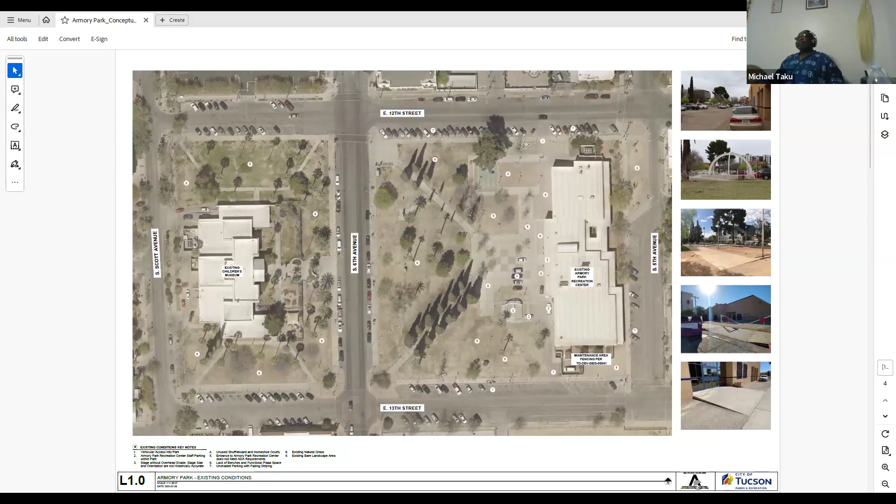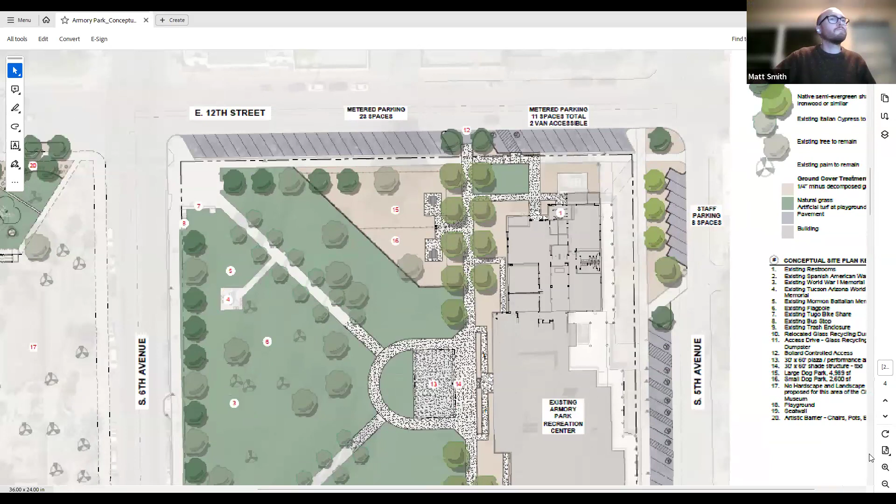So jumping into the conceptual plan, we have a few goals with this. One was to restore the stage, make it more useful, bring it to an area that's more in the historical context, enlarge the stage, to engage multiple users, multiple uses. The other was to bring back the trees of the park, both in an allée and the perimeter trees. With the parking improvements over the years, we couldn't work through the double line of trees along the perimeter, but we put in a double line of trees down the center of the park and shifted around the walkways, making the best of what we have with the 1970s improvements and trying to bridge that with now and with the historical context.

So the center part of our concept is this relocated stage. The stage currently is shown about 30 by 60, so greatly larger than what is currently there. I guess I shouldn't be saying stage, it's more of a multi-use plaza area. The stage is not elevated, it's going to be flush grade. Any of the existing concrete plaza space that's there right now will be removed. The existing trees that are in those square planters will be removed. And we're just bringing back a larger, more functional use area.

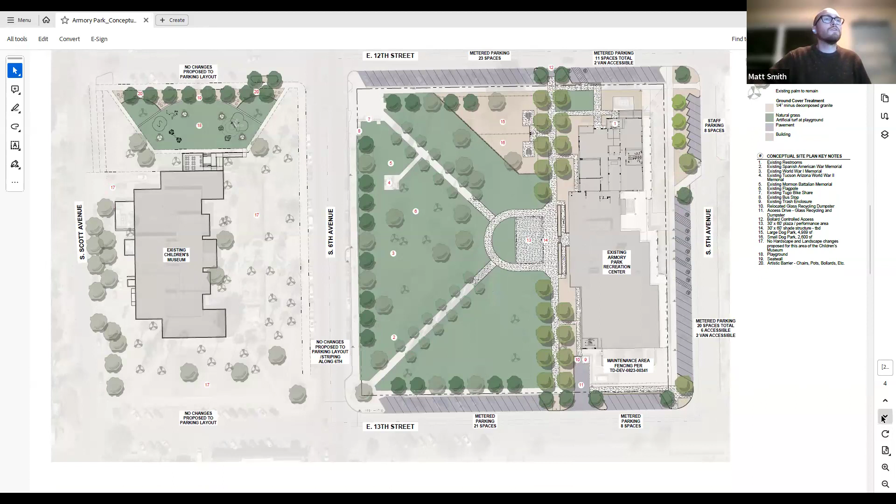We go now to some precedent images. These are options we were exploring for different shade structures, prefabricated and semi-custom. We could also explore fully custom, maybe incorporating a band shell. Swaim Associates is part of our team, and we are discussing with them options for this.

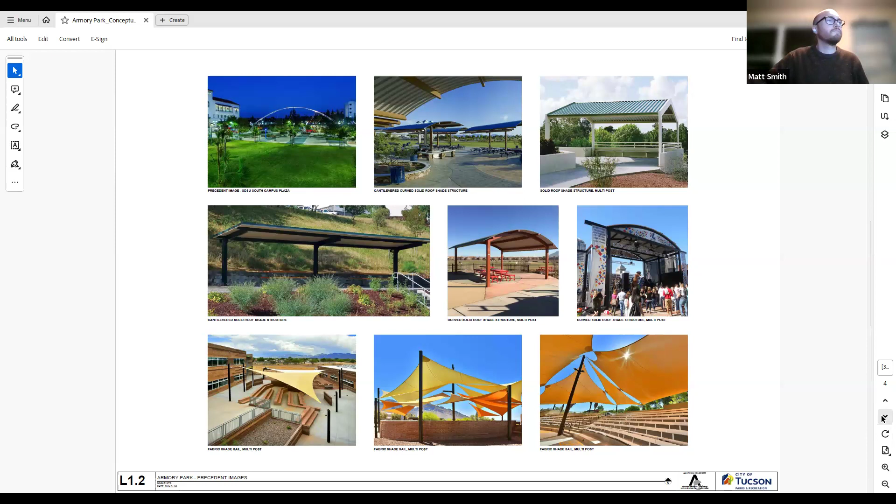The last bit of information covers some of the trees and materials we're proposing for this concept. Historically, Arizona ash flanked the sidewalk in a double course of trees along the perimeter. Some of those still remain sporadically. We are proposing, at least on the inner side of the sidewalk, to put this band of trees back, proposing that they be Arizona ash. As far as the central north-south array of trees, Chinese pistache or Joe Laney oaks would be two species we are considering, providing great shade canopy that fits within the character of the park and other parks in town.

One of the last trees we are looking at, more of a native tree, would be an ironwood, specifically for the staff parking along 5th, where there are some existing saguaros that this would tie together with.

Surfacing: most of the park surface that's not grass would be quarter-inch minus decomposed granite. Where possible, we could compact this for areas like the dog park, or if we wanted to incorporate games or other amenity areas within some of the larger open spaces. It provides a lot of flexibility while keeping with the character that's already there.

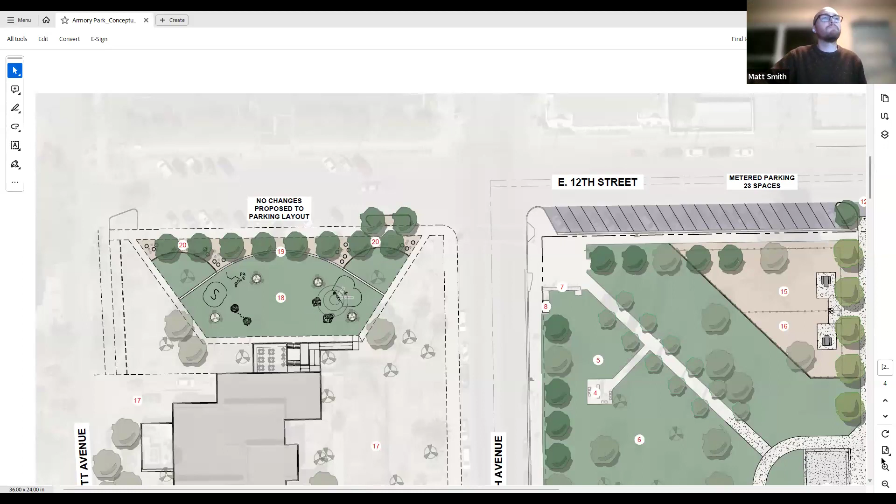Thanks, Matt. Jasmine, anything you want to add to that?

I know the reason we are breaking these up into two different projects is because they are two different types of projects, but we've been asked to look at several different issues impacting Armory Park itself, and we are conscious of the historical nature while also trying to meet the current needs of the community. We want to open it up to questions, comments, and feedback, but we'd like to focus on the two different projects separately, not go back and forth. So if we could focus primarily on Armory Park first and then come back to the Children's Museum area as a separate item, if possible.

I don't have anything to add. Thanks, Matt and Eric. Thank you.

Okay, I've got a couple questions for you. When I saw this, I was surprised that it hadn't gone to the landscape subcommittee of the Historic Commission prior to us, but I understand it's now scheduled for this Thursday. Is that correct? Correct. Okay. Steve Grady was unable to make it and is not here, but Jan Mulder is also on the landscape subcommittee, so after the board I may ask her if she has any comments.

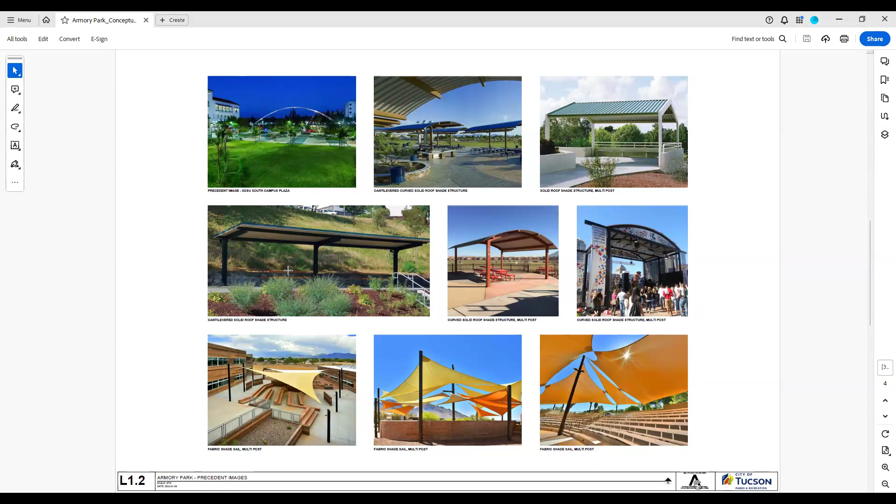Fencing, as far as the dog park is concerned, looking at it, you could look at that from two perspectives. The one you're looking at is taking characteristic features from Armory Park and using that as your basis. But you could also take a look at how to create the greatest transparency, because dividing up these park spaces is not typical of this kind of historic property. We worked with this at Anza Park, and it might be possible to come up with a fencing design that was as transparent as possible, which I think might be another alternative there.

Are you using DG for the dog park? We are, yeah, but it could be a similar treatment to Anza where it's turf until the turf dies out, if it dies out, and then DG is the alternative. Yeah, I just wonder what the dogs are going to like most, given dogs in Tucson.

Has anybody had any success in maintaining turf in dog parks? I think the best example is Anza. That's been going strong for 3 years now, I think. And we would have to reach out to city maintenance on that park and get their feedback.

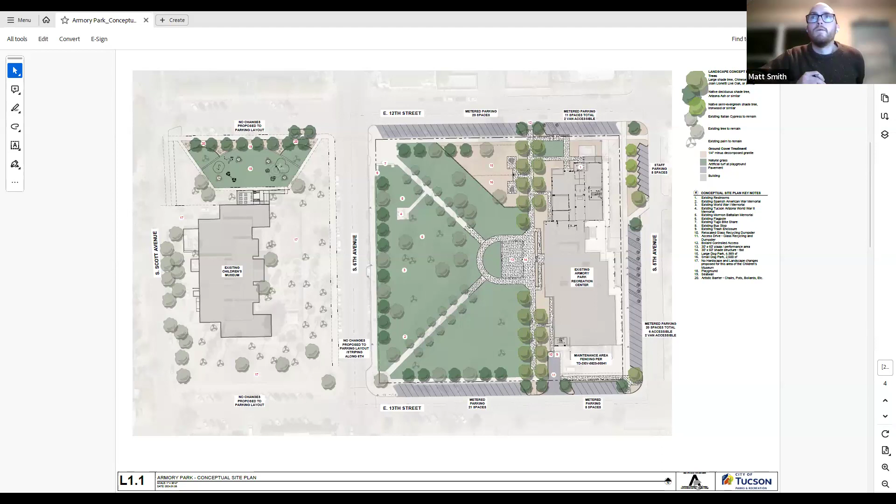Correct, we are still in the initial stages. Long way to go, but this is a great start with great feedback. Well, for $1.5 million, we should be getting a nice bandstand with a nice band shell. Let's put it that way.

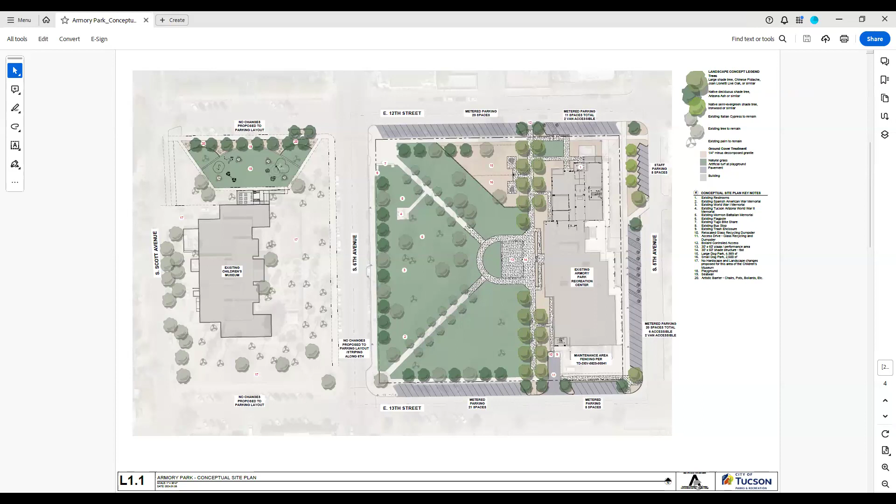Okay, Maurice, we've heard that. Some of us agree, but I think we're flogging a dead horse here now. So I think we ought to go ahead and move on, thank our guests, and move on to item E.

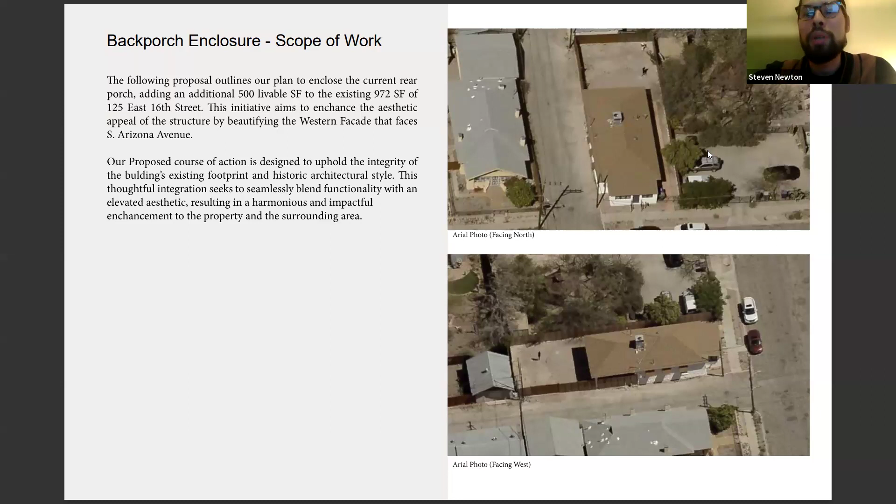The existing house is going to remain untouched, and the existing lighting plan is also going to remain untouched. So this is what the project is currently looking like.

We propose to use CMU because we saw in an earlier permitting set that was the structural system selected for the wall makeup. The roof is currently held up by existing headers and posts in the corner of the porch, so these are non-load bearing CMU walls. There will be stud walls built in front of them, which will be packed full of insulation as well.

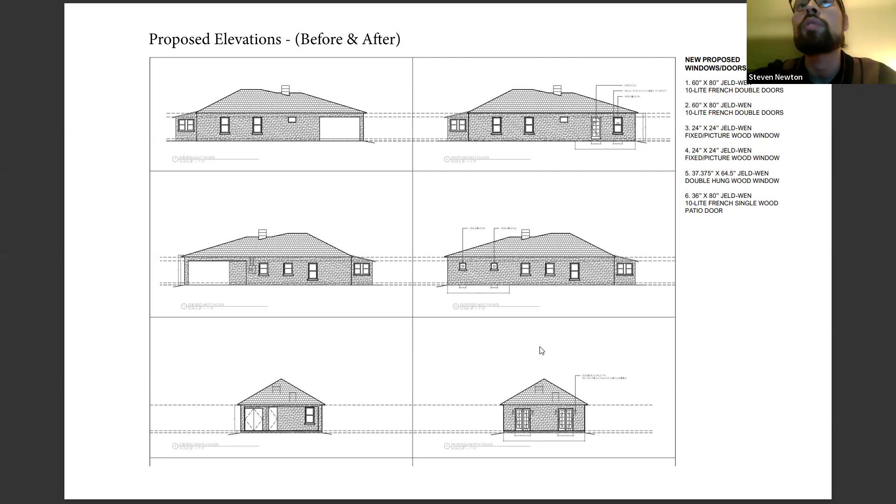Okay, well, it's replaced from what was approved on the plans that we have access to, because the 2010 plans, which are available on the pro site, do show that it was a restored original wood window that was vertical in nature, about 18 inches wide by a little over 2 feet tall, and they were allowed to put on new concrete sills.

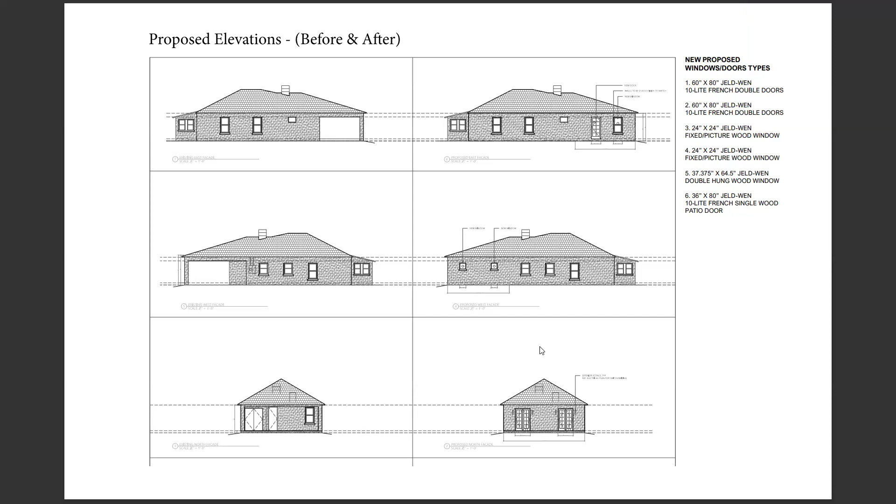I'm not sure who did the stucco job, but it looks like gunite on top of stucco at this point. And it did have originally a rock wall there, but you're also showing a recreation of a rock wall with stucco on the lower section of the CMU wall. Is that correct, or is that just going to be smooth stucco all the way down to the street?

We were thinking of just matching exactly what's on the existing house, just for consistency. So like the stick-on fake bricks and then stuccoing it to match the house is what you're thinking there? Something like that, or if we could get away with using the natural material, that might be the better looking of the two.

Okay, conceptually I don't necessarily have a problem with what you're showing. Now that I see you're dividing the new back room into 2 rooms, the French doors make sense for the western new room, but 3 new doors on a single room is a little out of the ordinary.

It would be helpful to have pictures of French doors, but I know there are some in the development zone, so I'm not going to question that. And wood, we always prefer.

Conceptually for the enclosure, I don't necessarily have a problem, but I'd like to see an updated plan that includes all the stuff that's been done and ask for permission, because you'll probably be approved for it.

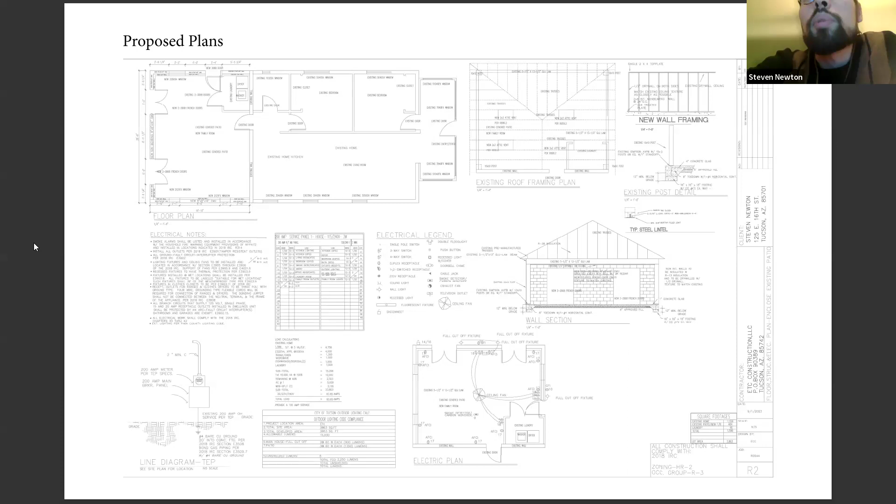Yeah, I believe that is an existing condition. My contractor might have pulled that from an earlier set of drawings. I agree, it's a bit redundant because none of these walls proposed are actually in fact load bearing. Well, that detail shouldn't be on the drawings. If I was a city, I would have a real question with that.

I think it's a problem because it can't be built as shown. So, you know, you can do what you want. Has the city approved these plans?

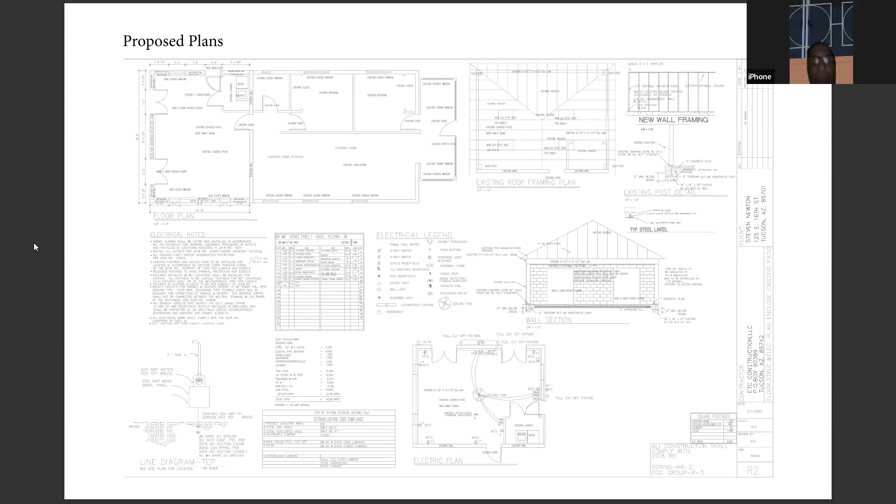The city has reviewed it. They're basically waiting for historic review to go ahead and do their rounds, and then I believe zoning will get a chance to review it afterwards. We're part of a zoning review. After you get a director's decision, once it is approved through us and then PRS and the planning director, then you'll have to go to building permits, and then they'll tell you everything else that you're actually going to need based upon the record of what they have. So they're separate issues. Michael can help you walk through some of that sort of thing.

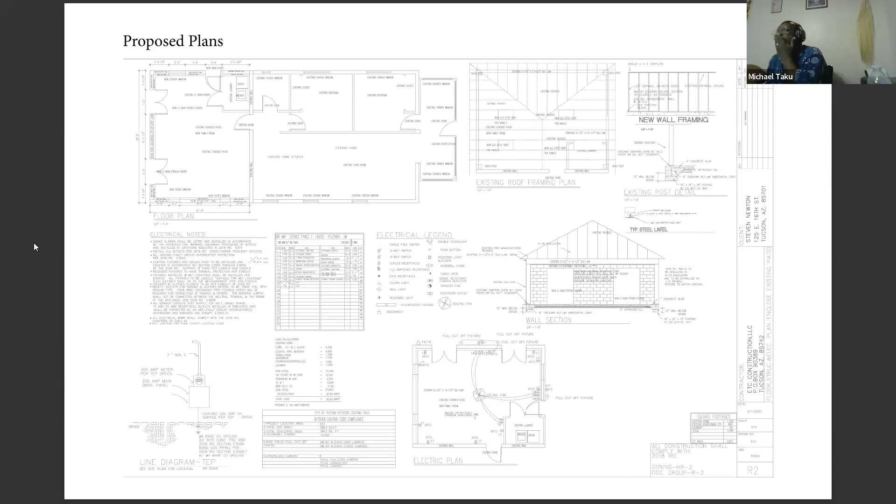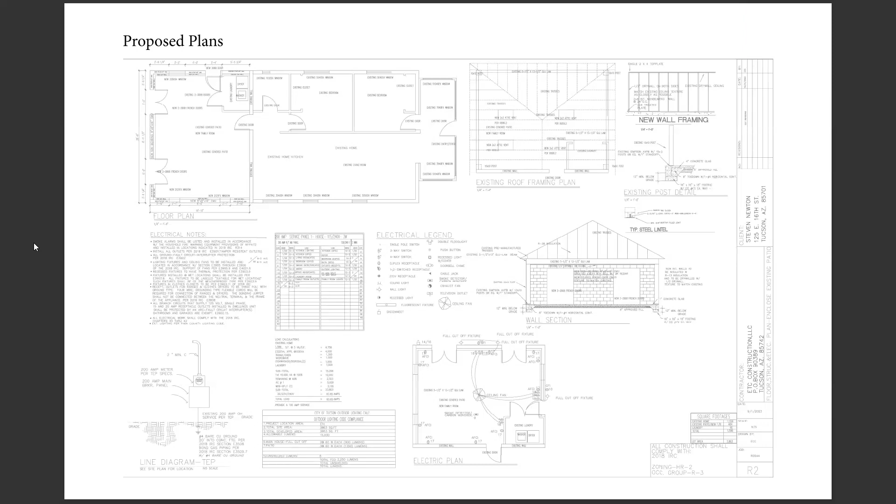Another thing that is kind of a fallacy on your front porch. The proposal in 2010 of putting in the windows on either side of the door showed a 4-section set of windows and another 4-section set of windows. They are not the same size, as you can see from the front of the building. Right, one of them is a set of 3 and one of them is a set of 2. So you may want to revise those. That's what it actually looks like. And yeah, that's what they built. Yeah, that's what they actually built. So you just may want to revise that as built. Right, okay.

Pat, any comments? Yeah, I've had just a couple. We've already covered this, I'm sure, but I'm still unclear how all this work got started without being reviewed. Nobody turned them in, apparently. I beg your pardon? Nobody formally turned them in. Well, I mean, so how do we address that? We fix it now through the design review process, hopefully.

Well, it seems that it establishes a bad precedent for other similar projects in the neighborhood. And I'm kind of concerned that we just are basically just, we'll say, well, it's there, it doesn't look too bad, we'll go ahead with it. I am concerned with that particular part of the project, as well as the other installations that are going to be or are in or going to be placed in the backyard that we don't have plans for.